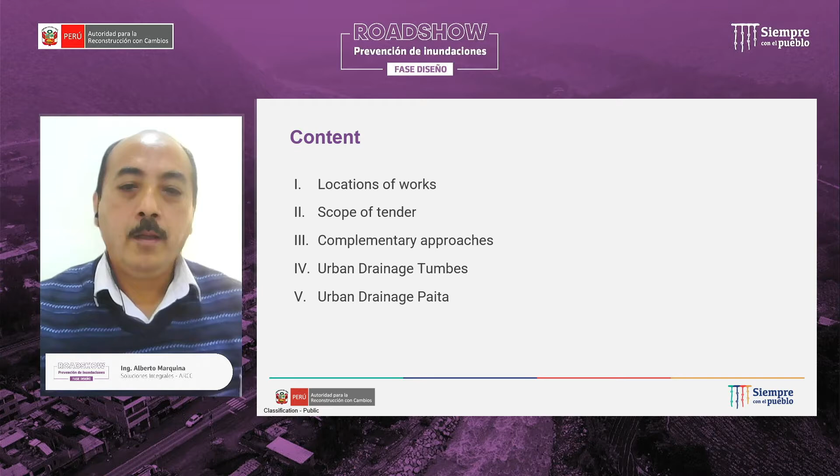As we already established, the portfolio has 2 projects for pluvial drainage in reference to the Niño phenomenon, and also considering precipitations that can cause floods and generate disasters that we all know.

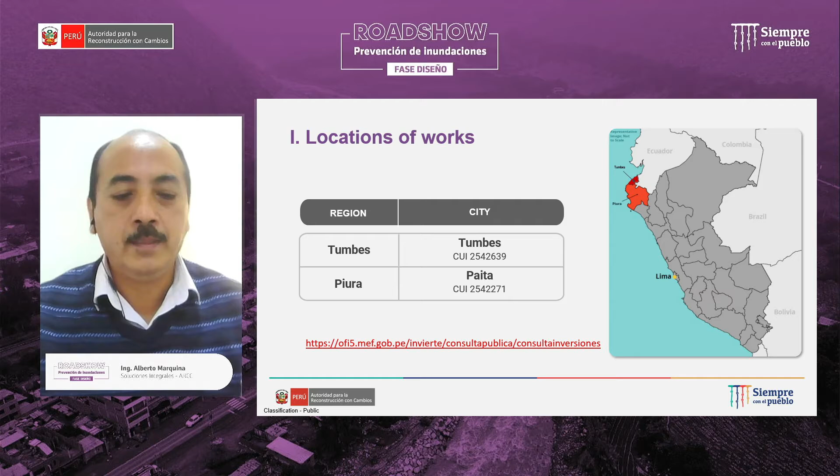We've formulated 2 different investment projects with unique codes mentioned here for Tumbes and Piura, which we can access publicly on the webpage of the Ministry of Economy. Considering these matters, we are establishing this so that those interested can have access to this information.

Here we're going to put the information of the design service, summarized in 3 key aspects that should be taken into consideration.

The first point is that the design takes as reference the pre-investment study that is viable for each drainage. We've established a technical base study that should be considered to develop these designs. Also, as part of the design, we expect to develop the whole drainage system and river defenses in reference to topography, geotechnics, and other specialty studies that allow us to carry this out.

Based on this information, the third point is to develop the hydraulic and hydrological modeling that allows us a first approximation of the designs and helps resolve the problem of floods. These modelings, especially hydraulic, should be developed first without a project to see the affected areas, and based on that modeling, establish measures that consider a with-project scenario, to actually carry out and solve the issues.

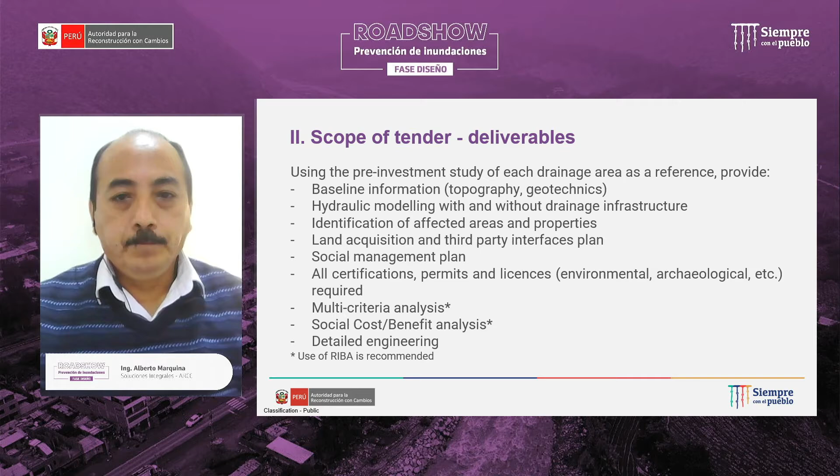Beside the criteria already stated, an expectation we have, as mentioned previously, is to have interventions that are sustainable economically, socially, and environmentally. To achieve this purpose, what we want is to pass from the conventional designs we normally have on hand, which are large infrastructure designs, to structures that are integrated into the city.

What we want is innovation - to incorporate these measures so these systems can be sustainable and admirable for the cities and the people.

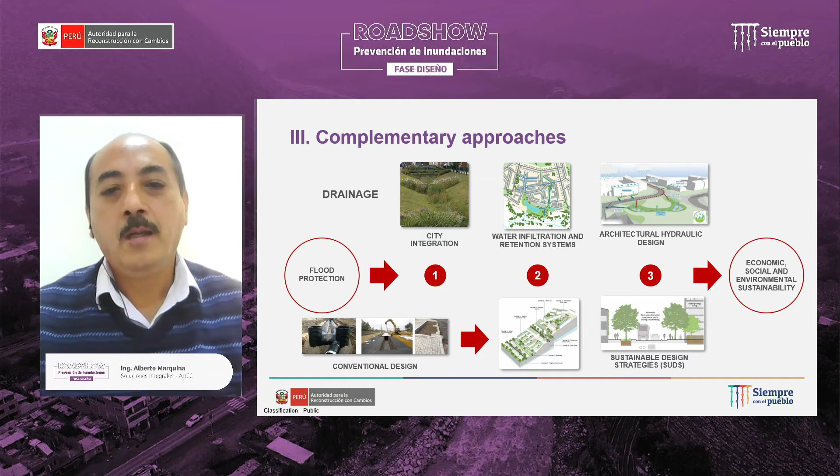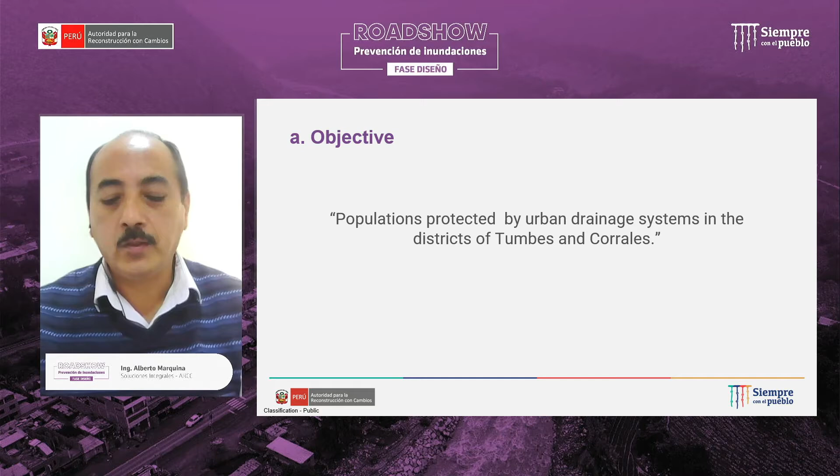I'm now going to give detail in reference to a more extensive part of the drainage of Tumbes. We've stated the objective of the case of the project of Tumbes and drainages in general is that the population of the city of Tumbes and Corrales, located in the province of Tumbes, are able to have suitable access to drainage services. In summary, for them to be able to have drainage services that actually work. These projects are located in the region of Tumbes, which is a border region with Ecuador.

Within the main objectives set for these projects, in the case of Tumbes, we are talking about approximately 152 hectares, and we need the evacuation of around 73 cubic meters per second. We are setting main structures to achieve this purpose, organized into structures of recollection of pluvial waters, transportation, storage in some cases, and evacuation of waters.

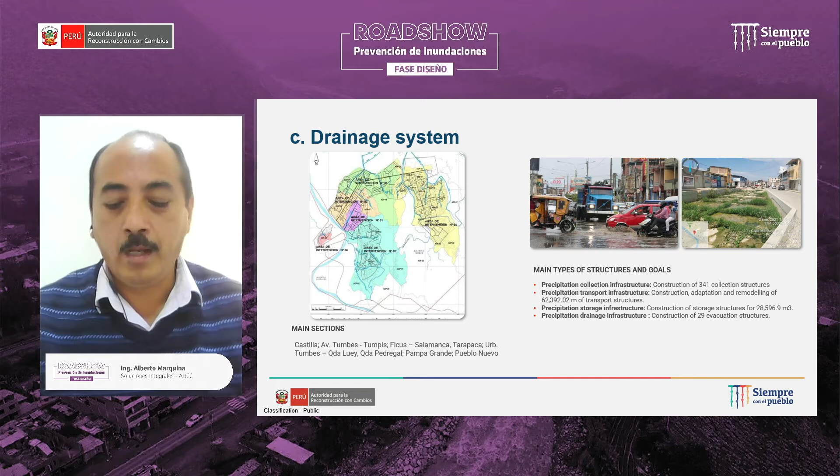What we are establishing as a pre-investment part is around 62 kilometers in networks and transportation structures to achieve 28,596.9 cubic meters, and around 170 hydraulic stations that will be complemented to meet the objective. The main stretches where we've identified interventions are located in Castilla, Tumbes Avenue, Ficus, Salamanca, Tarapacá, urbanization of Tumbes, Pedregal, Luey, Pampa Grande, and Pueblo Nuevo. These are some references in reference to the project.

In the case of Tumbes, the investment amount for the projects is in the order of 310 million. Given the magnitude of investments that is established and needs to be done, it is necessary that the designs are quite safe and allow this investment to meet the objective.

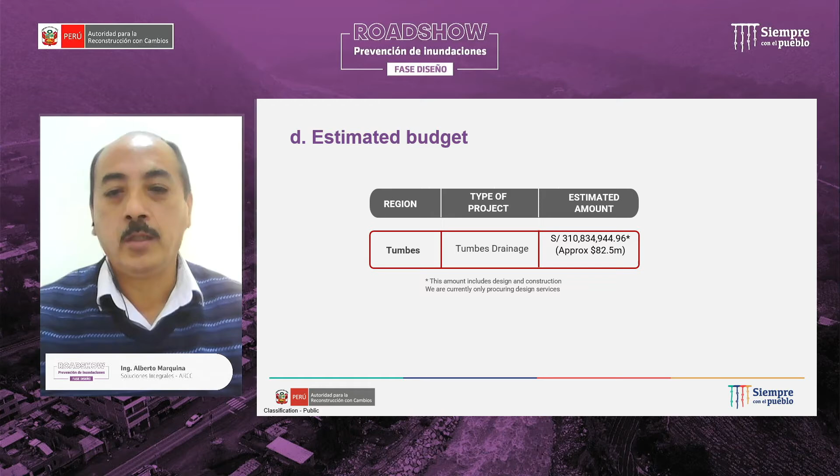Next, we have the urban drainage for Paita, located in Piura. The objective, as stated in the previous case of Tumbes, is for the population to have access to this service. In the case of Paita, this is a population with two very well-defined levels: a low part close to the ocean, and a high part, which also evacuates towards the lower part. These two levels, like two terraces, are able to be treated in an integrated manner.

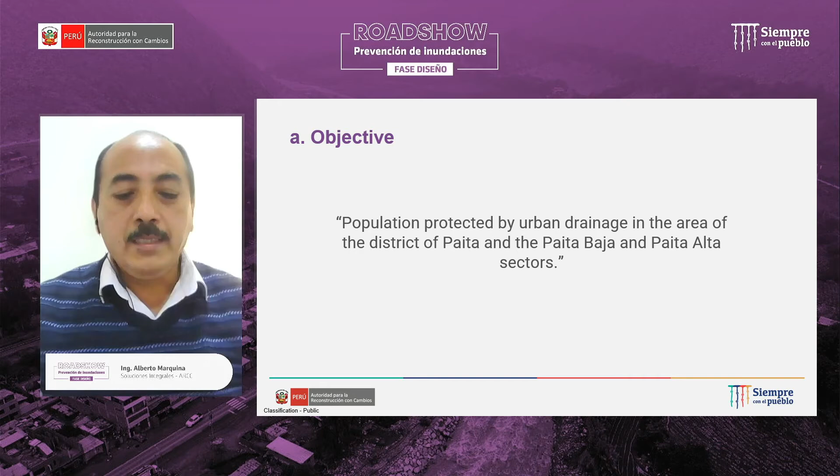But something complementary in the case of Paita is that this was separated into the high part and the low part, and it's put together in reference to a slope. This slope is approximately 36 hectares, which requires treatment to stabilize it.

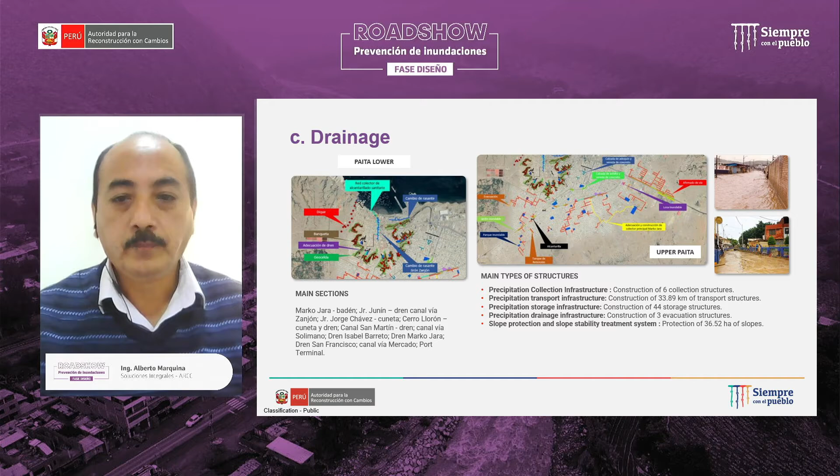In the case of Paita, we have these parts that are being prioritized. We have a project in reference to 186 million soles that, as I said, requires a rigorous design in order for this to be shared without any issue.

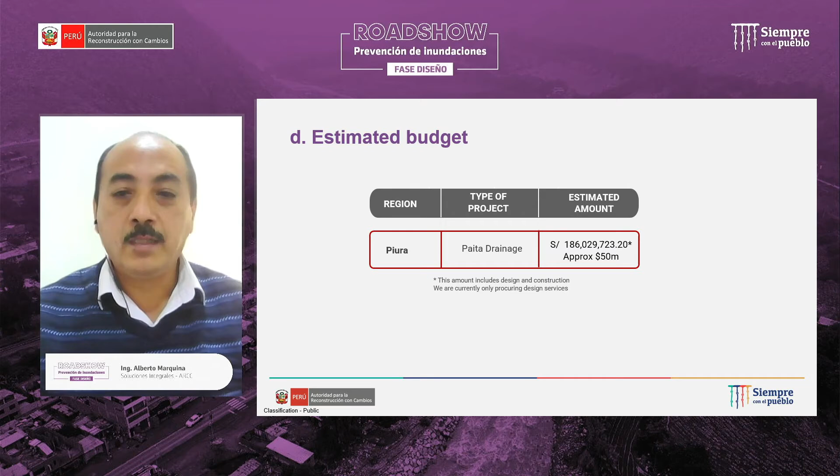Now we are going to share the river defenses of the Chancay rivers, located in Lambayeque, Cajamarca, and the Rimac River. Similar to the previous parts, we're going to develop the interventions, how these river defenses are incorporated in reference to this integrated focus, and finally the scope of both projects.

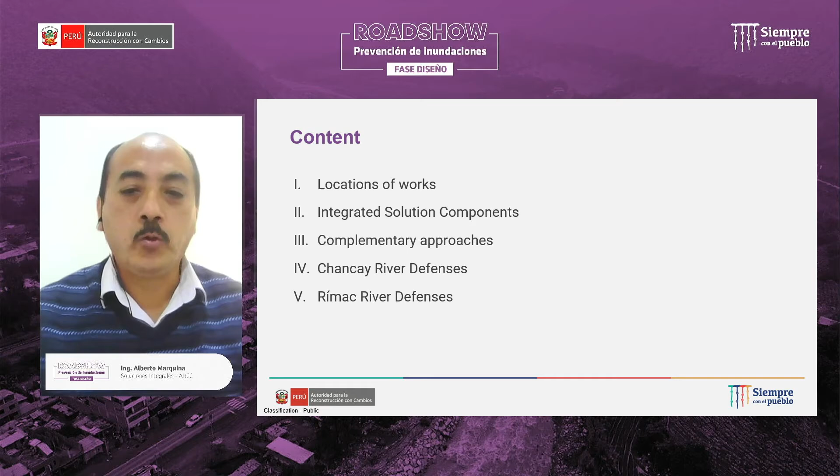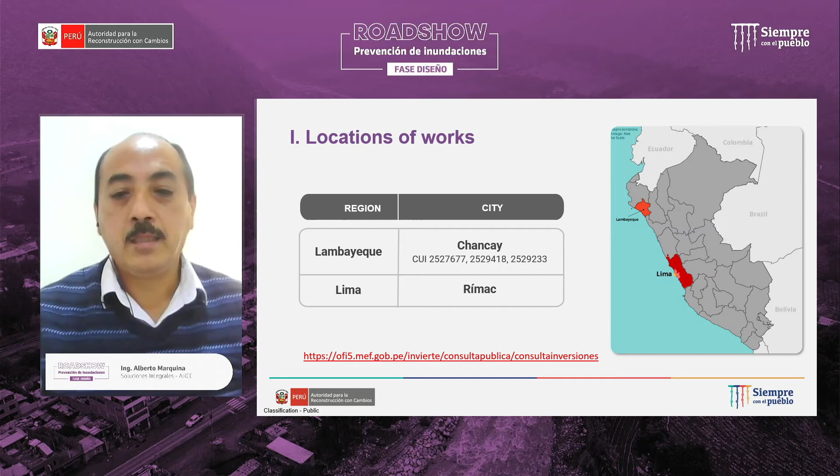Again, this is just to specify that in the case of Lambayeque, this is a component established by 3 investment projects. As mentioned, this can provide access to all the information of the pre-investment study through the link in the interior part here, and there will not be any more restriction to providing this information, which is free and public.

Considering these aspects, these are all focused on the component of integrated solutions, in reference to the floods in the rivers. These are formed by 3 components. In the lower left part, we have included the river defenses.

This is actually used to be able to consider the rivers, in reference to this analysis, given the capacity of the flow of water in the lower part.

In the middle high part, we are able to consider these dams. And finally, the component of natural infrastructure, which includes reforestation, to be able to stabilize and complement this.

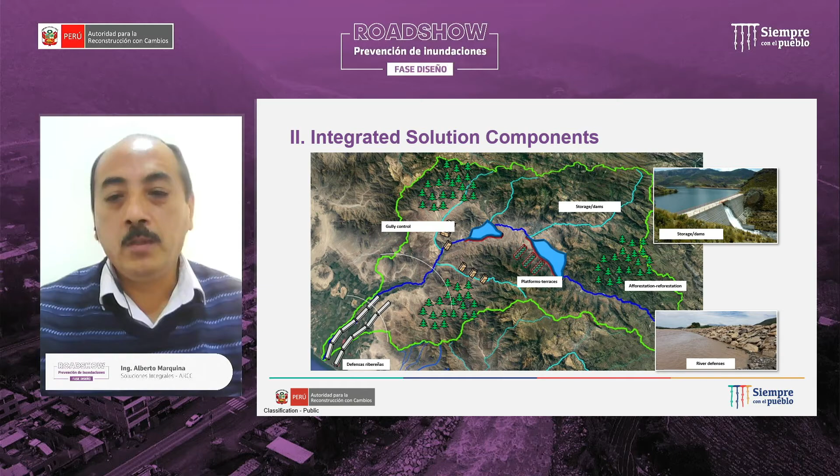This is a schematic way of showing these components that I've just mentioned. Component A, which includes river defenses, component B, the dams, and component C, natural infrastructure, reforestation, soil conservation, and terraces.

And early warning systems. Here, considering this aspect in reference to the river defenses that are established.

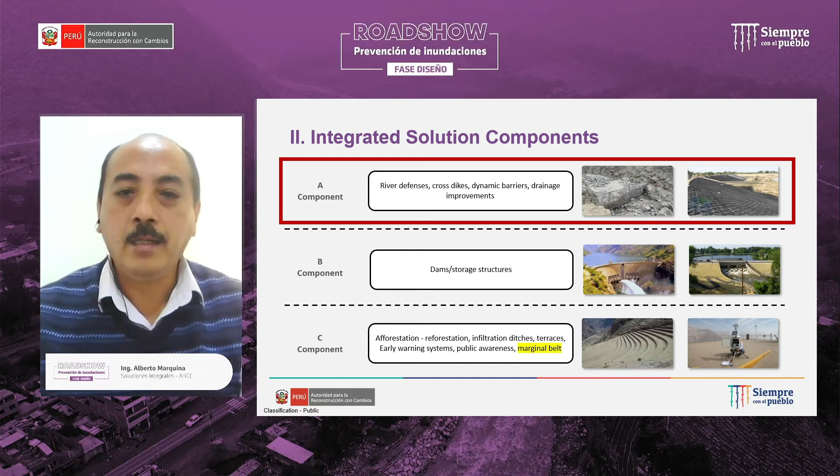Very similar to what was mentioned for the drainage systems. In the case of river defenses, as is being mentioned, the river defenses are in place both in urban and rural areas.

For that reason, we are also establishing that we are able to pass from conventional designs, which were basically rigid structures, to sustainable designs.

When we talk about sustainable designs, what we also expect is that in the cases in which the river defenses are in place in reference to urban areas, these are able to be integrated as well in the rural area.

Not only with the natural landscaping, but also with possibilities of access to archaeological patrimonies, and to be able to consider the different resources that the population has throughout the design.

In the rural area, the population accesses the river, and what we need is river defenses to be able to consider these accesses for animals to drink water, to be able to carry out their normal activities.

And there are other kinds of activities that require structures to have and consider this kind of decisions. It is about considering these hydraulic parts that allow us to have these structures have a different functionality.

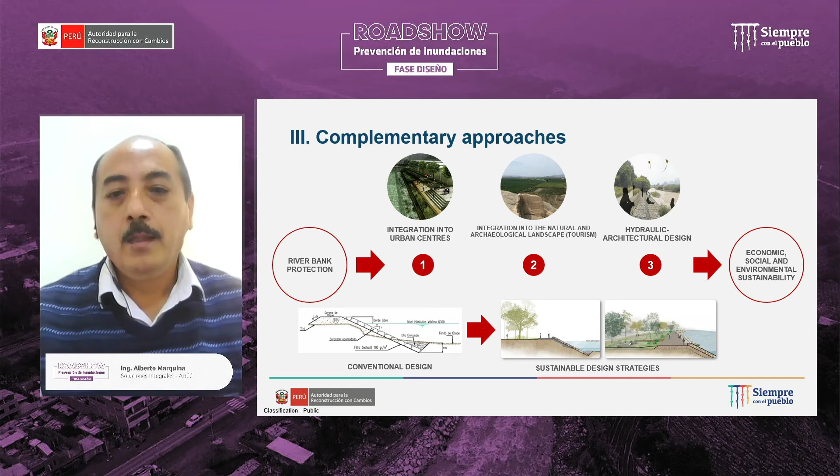In times where we're seeing an average flow, or in situations of maximums that come and go.

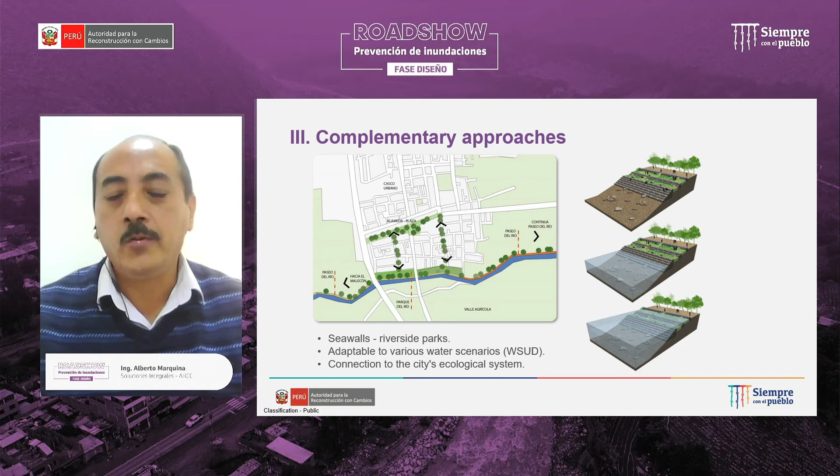The maximum river defenses are established, and they are able to be integrated into these different hydric resources, and to be able to connect to the cities.

In the case of the Chancay River, in a summarized manner, what is being required is that the population located near the river defense has protection for floods.

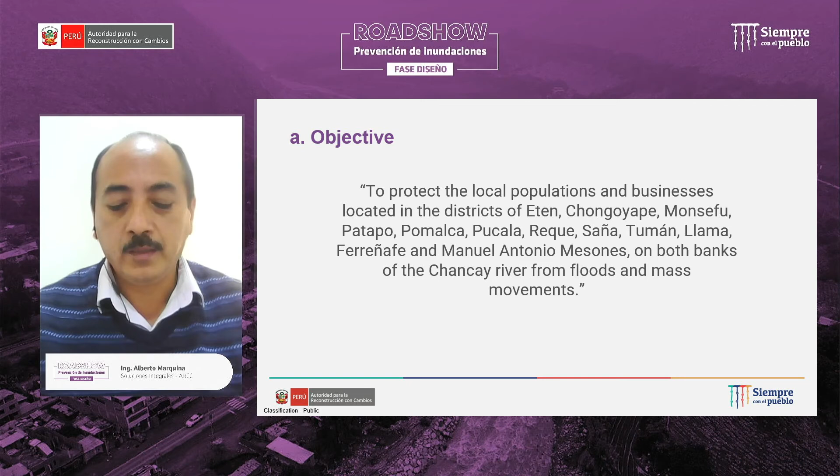This is considering the cases of Monsefu, Patapo, Pomalca, Pucalá, Reque, Saña, Tumán, Llama, Ferreñafe, Manuel Antonio Mesones, and the population located in this area, in order to get protection of their lives and the goods located in these areas along the river.

This project is also focused on the northern part of the country, in the region of Lambayeque. As we said, the basin of the Chancay River also forms part of the region of Cajamarca, and it includes two districts within the scope of this project.

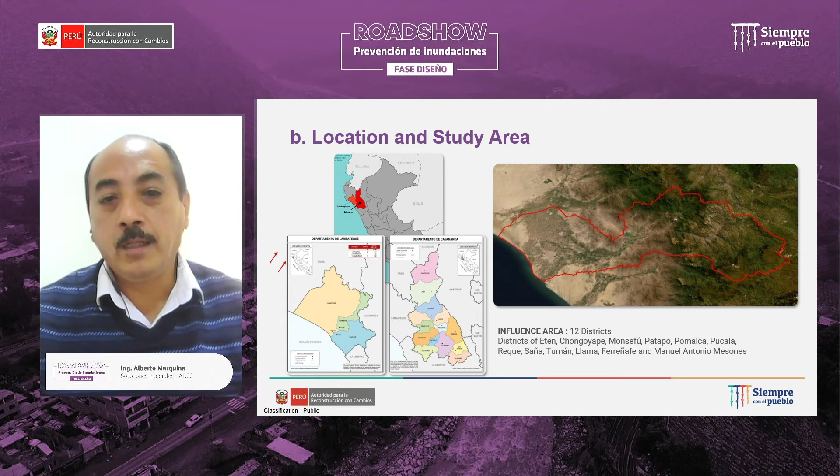In the case of Chancay, we have been able to prioritize 4 stretches in the Chancay River, including 65 kilometers, 12 intakes, and 3 dikes, considering what was established.

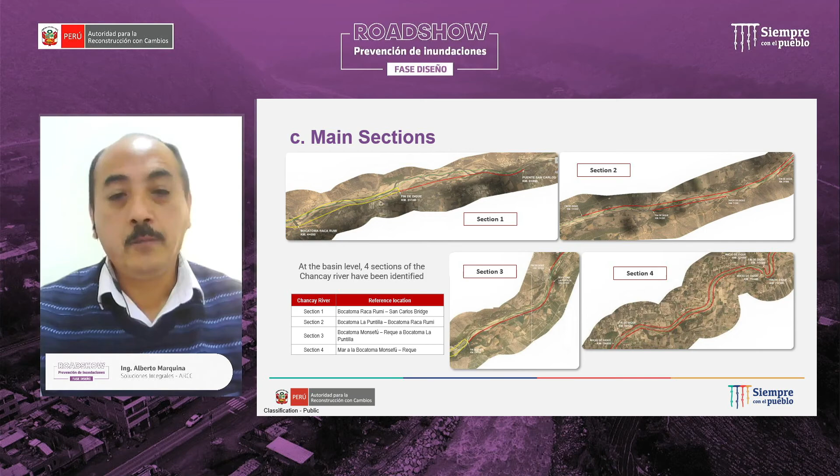What we are establishing here is the design of around 65 kilometers of dikes, with focus in reference to 3 dike areas, in reference to the exceeding flows. In the Chancay River, we have a variation between 900 to over 2,000 cubic meters.

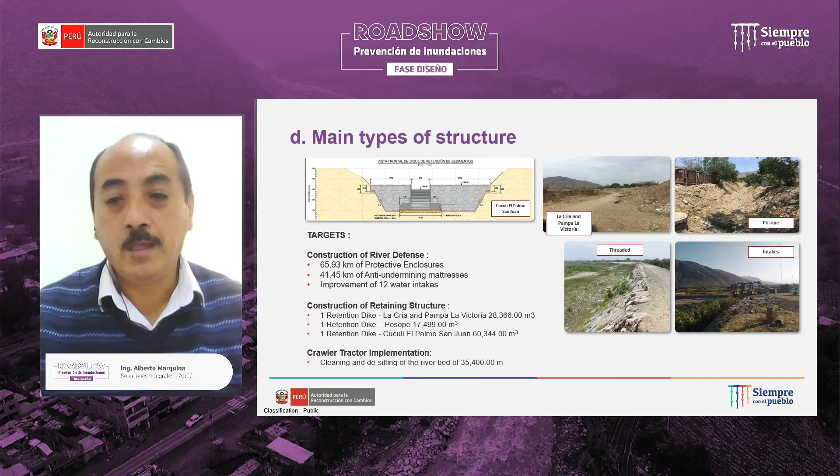There is an important part to be able to have all of this met in the objective that is desired. There is something that we want, and which is the expectation, which is that the design is able to take advantage of these potentials, which in a certain case, in reference to the defenses, is able to have this integration with landscaping, not only with the urban area, but also with the rural area, in order to have these evaluated by the population and to be able to integrate this solution.

And what is important here is that we are able to establish this in this use, in this multi-purpose part of this defense, considering the intangibility of the marginal belt to be able to provide stability and sustainability to these areas, specifically speaking.

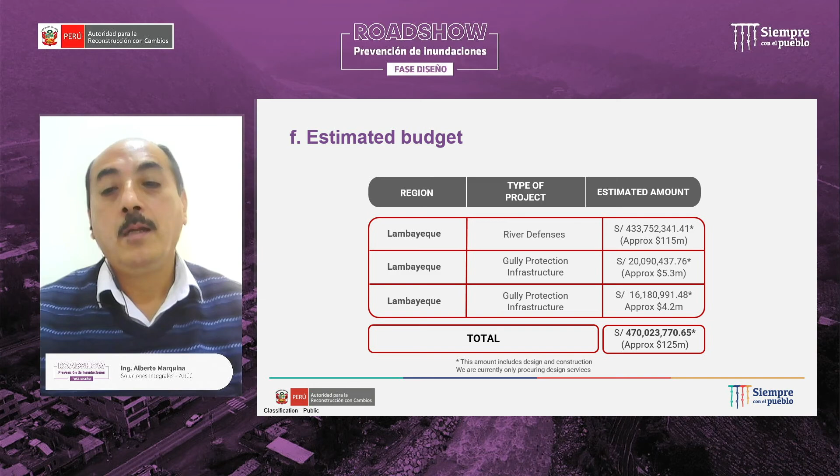In the case of Chancay, well, as we know, this is formed by 3 projects, and the accumulated amount of investment is going to represent 470 million soles, from which here the need of also being able to have designs that are quite rigorous, solid, that allow us to be able to meet the objectives and that this investment is actually well executed.

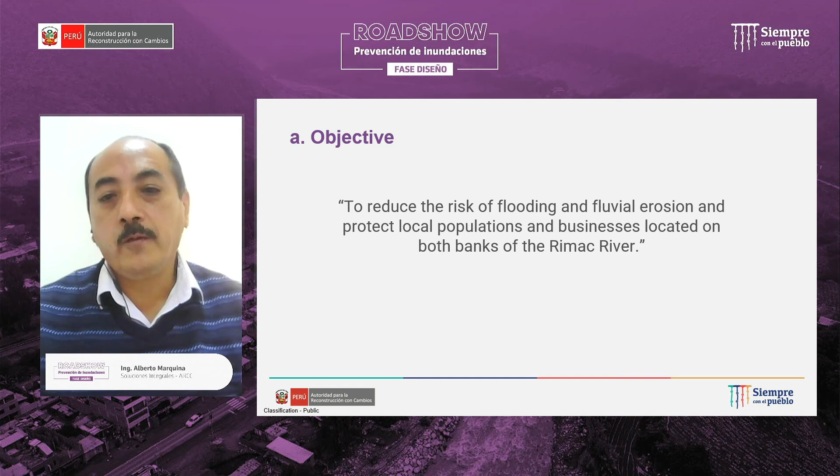We are now going to briefly describe the scope of the Rimac River. The Rimac River is located in the region of Lima, and the objective is to be able to reduce the risk in reference to floods and fluvial erosion in the productive units, public and services in the population located around this river.

In the case of the Rimac River, we have been able to develop this basically in 3 provinces of Lima: Callao, which is the one that is basically located next to the ocean, where we have the discharge of the river; the area of Lima itself; and Huarochirí, which is the high part. We've been able to identify 15 districts that were attended: Carmen de la Legua, San Bartolomé, San Mateo, Santa Cruz de Cocachacra, Santa Eulalia, Ate, Chaclacayo, El Agustino, Lima, Rimac, Lurigancho, San Juan de Lurigancho, and San Martín de Porres.

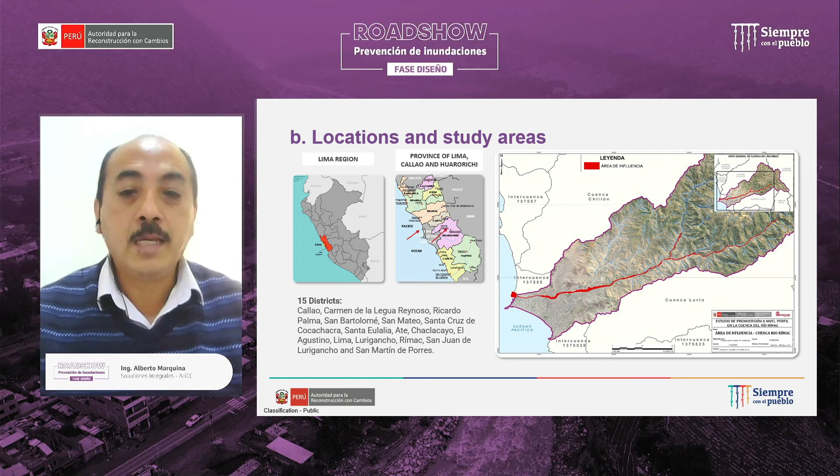This is a quite extensive displacement. This is one of the projects that we are going through the capital of Peru, and in the same way we are able to use this to avoid disasters and flooding.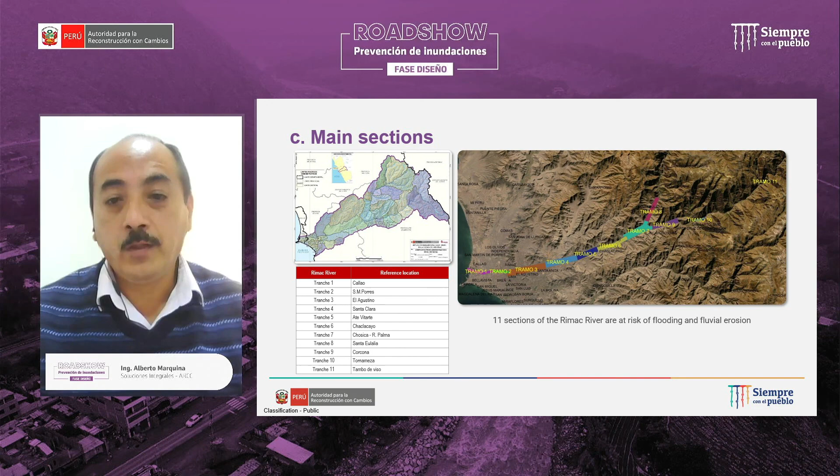Here we've been able to identify 11 stretches throughout the emplacement that I've mentioned. And what we expect here, in reference to this, we have different areas that have been identified in reference to pre-investment.

In this project, what we are trying to have is around 60 kilometers in river defenses of different typologies. Here we are mentioning some typical sections in reference to what can be implemented, in reference to the proposal established in viable studies, both for dikes and armed concrete, which are proposals of sections in reference to being able to establish the development of the river in areas where there is very little availability of land, given the restriction that is established to be able to set the river.

Here, considering the different criteria that are established in what is considered to be a part of the contract and what can be subscribed for this.

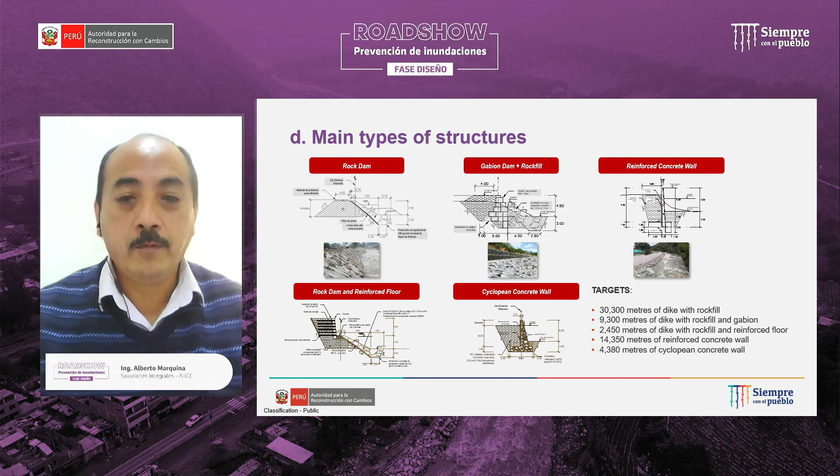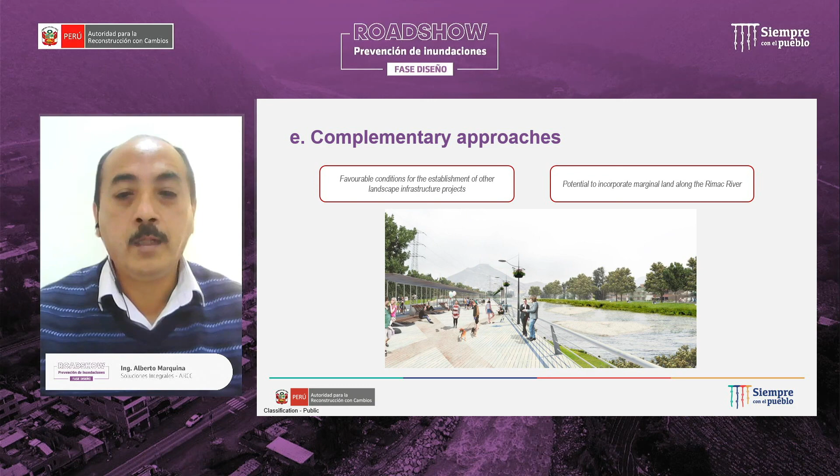Here, in the case of the previous part, we are establishing that the development of this can be integrated into the city, and this can also contribute to the intangibility and definition of the marginal belt, to be able to determine why these areas are seen affected.

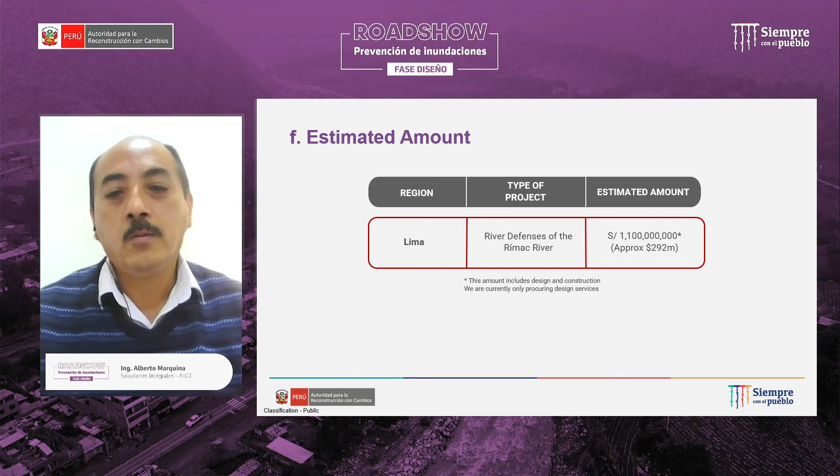And finally, here to establish that this project is quite ambitious. It has an estimated budget of 1.1 billion soles, and again, due to the level of investment, we do require these projects to have rigorosity in their design. And also, thank you to all of the people that are participating in this event and that are, of course, interested in making their proposals to be able to get to these results. Thank you very much.